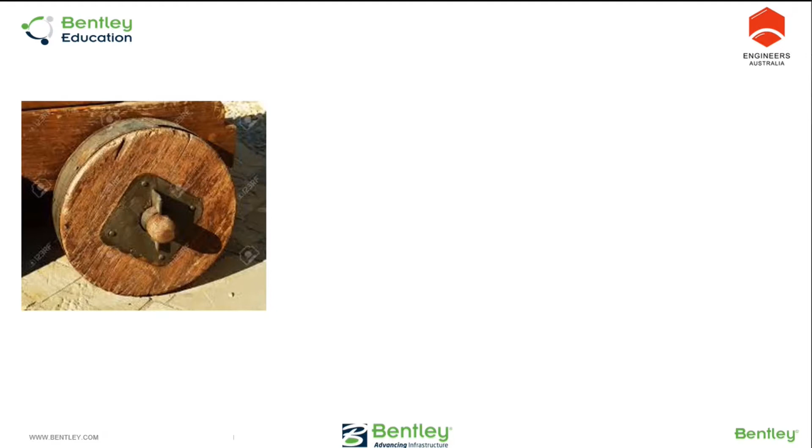The next one is a leather suitcase. Are you aware when this was invented? This was invented as late as the beginning of the 19th century. So when a wheel and a suitcase, independently invented, were brought together, a suitcase with a wheel fixed on it improved productivity and mobility. This was invented in the 1980s. And now there is no traveler who travels without what we call the wheelie, or whatever you call that, right? So how is this relevant?

In the engineering world, CAD is the wheel, BIM is the suitcase, and digital twin is the trolley or wheelie. CAD was actually the first ever revolution that happened in the engineering world. In my earlier engineering days, we used to work on paper-based design, protractor-based design. I'm sure all you engineering students or graduates now would not be working on paper-based design — you would have started working on computer-aided designing. That brought in a tremendous amount of revolution into the world in the form of mobility, sharing work, collaboration, and version changes. From CAD, we migrated to BIM.

CAD actually gave you two-dimensional, possibly three-dimensional designing as well, but then BIM brought in a tremendous amount of data into it — so a design with data, but the data is not real-time data, it's past data, that's what BIM is. People keep talking about BIM solving all problems in the construction world, but BIM is not the ultimate solution to every infrastructure problem today.

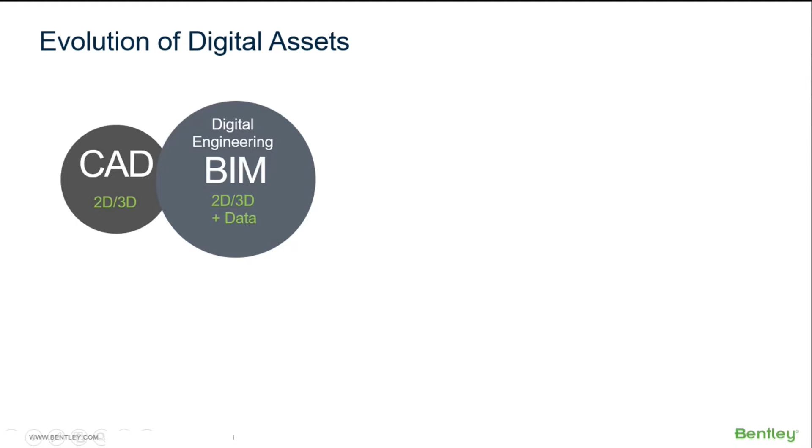From there - and this is very specific for the engineering and infrastructure engineering industry - you start getting data onto that. But the data is not real time along with the 2D, 3D. What digital twin brings across is live data, connected data.

Imagine if you can have a design where you can have live data to look at what happened in the past, and use that live data to do a simulation - to find out if this bridge has been taking about 500 vehicles an hour, and in about 5 years if it's going to be 5,000 vehicles, what is going to be the effect. That could be done on a digital twin.

So digital twin actually helps you do a digitally driven organization or project across the board. Why am I bringing this across? Every organization today in the world - 7 out of 10 larger organizations - are completely digitally driven. They're not going to work with any of the old non-digital models. So it becomes absolutely compulsory for every one of you to be digitally learned, digitally skilled, and that's where this journey will talk about what phases, tools, and how we go across.

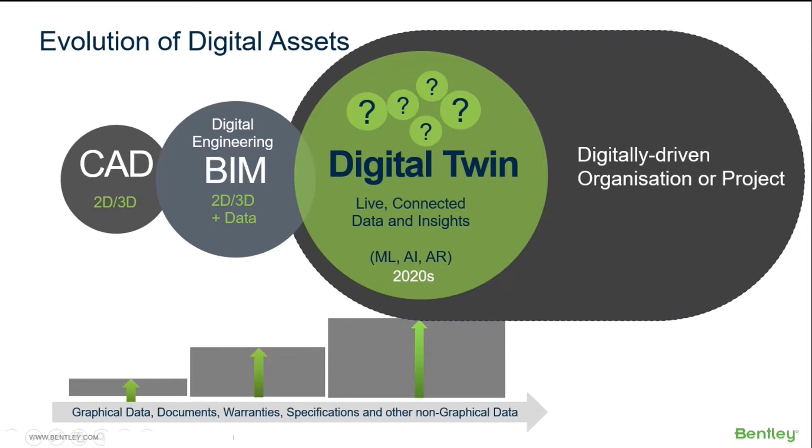All right, so everybody talks about digitalization - why is it important? Particularly in the infrastructure industry, this is for civil engineers and architects. I had taken a chart of 3 different industries here. This is the infrastructure industry, which I've been working on for very many years - can you believe it, it has got the lowest.

Don't worry about 2014 - even today the data is almost the same. The lowest per capita productivity, that is how much each person produces, is lowest in the infrastructure industry, and highest in the manufacturing industry. Why is it? One, infrastructure industry's life cycle is very large - when you build a bridge, it possibly survives your generation and the next generation as well. But also, because of the complexity of the industry and lack of digitalization, per capita productivity is lower.

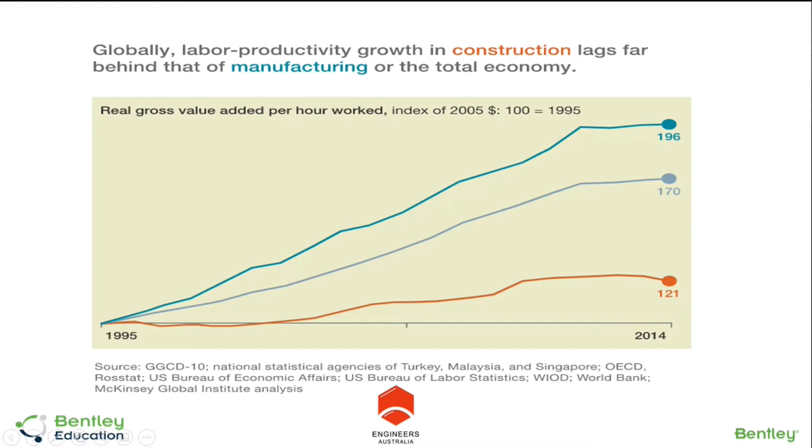I'll give you more data to tell you a compelling story why it has to be digital. Are you aware the infrastructure industry spends the maximum - 13% of the world GDP - the highest in the world? We spend the highest money but get the lowest productivity. If I even increase this by 1% to 2%, you are saving 1.6 trillion that can come back into it.

So the compelling story is not just about why the industry needs digitalization - it's compelling to all of you, why you should be digitally skilled, so that in the industry you would be the most sought after, because they are all looking to improve this 1% to 2%, looking to save this 1.6 trillion. So if you are digitally skilled, if you know the digital processes in any part of the industry, don't you think you'd be the most sought after resource in the market? That's the journey I'm going to take you through.

Okay, digital twins in multiple other industries - other than infrastructure. I'll give you an example here: Red Bull is one of my favorite teams in the F1 race. Are you aware designers are making up to 1,000 changes per week between races? Every week there's a race. In fact, they make hundreds of changes between lap practice and the main match.

That is the level of changes they do because they work on the digital model, not on the physical model. If they want to change the axle or the diameter of the tire, they don't work on the physical model, they work on the digital model.

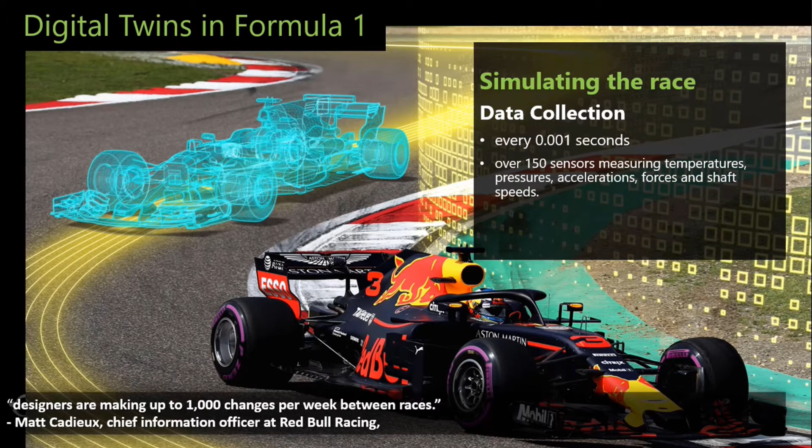Simulating the race, because you have digitalization and the data is live, you can even do a digital simulation of what if the speed goes up a little more, what is the level of thermal heat on that one, what if this wheel spins faster, what is the effect of that? You can do all those simulations.

So this industry is doing extremely well. They are able to make cars that are safer, more reliable, and high performing only because of the digital twin, because they do all the designing and operation on a digital model, not on a physical model.

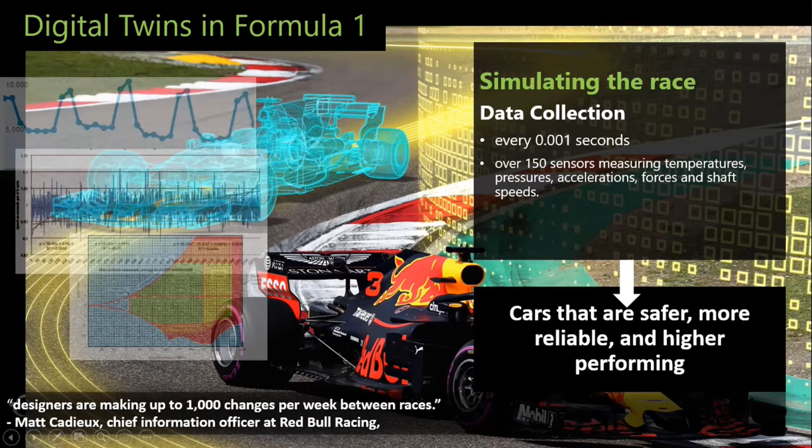Now let's look at the aircraft industry. Same thing: the engine component, the aerodynamics, the fluid dynamics, everything is simulated using a digital model. Even before the first physical aircraft comes across, there is a digital model available.

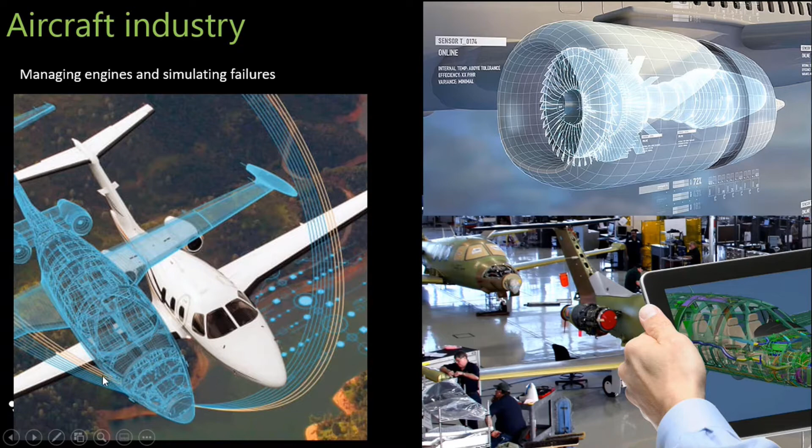But in the infrastructure industry, let me go into that. Where are the places digital twins can play a role for you? You could possibly, in an existing built environment, collect data to find out how to optimize energy consumption. Today everybody is talking about carbon emission, controlling carbon credit, zero emission. A digital model can help you provide data to find out how to change the energy consumption.

And then if you're in the road or rail industry and you want to make a career out of that, you can monitor, track where, and then predict when, rather than react to it. You can proactively maintain the track by doing a digital model to simulate how the track performs.

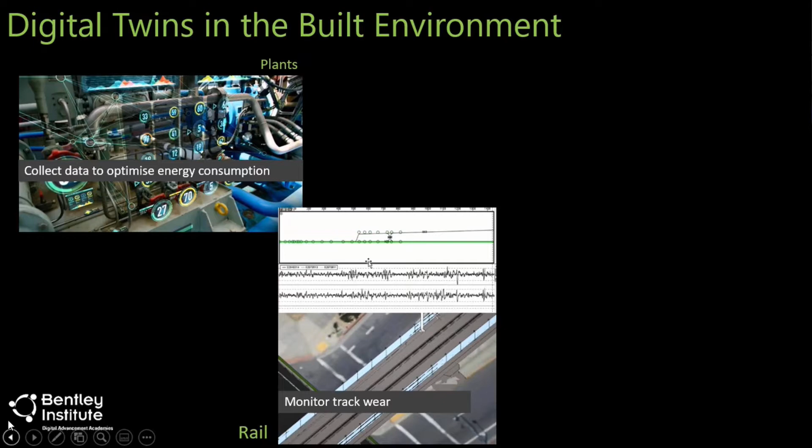And then if you look at it, if you are possibly in wind turbines, you can optimize the turbine performance through better design and better operation.

I brought this very specifically now because in Australia, there is going to be an Olympic game in 10 years from now. If you are going to be a transport modeler getting into a career there, they would like you, possibly in the city of Brisbane, to plan what the traffic increase is going to be. How do I do traffic planning so that congestion could be avoided? How do I ensure carbon emission is controlled? That is what you can do in a digital model, and that's another career opportunity.

Because the Olympics are coming, there are going to be a lot of new cities and new townships built around. You can do complete utility planning: the electricity underground planning, the water planning.

Talking about all these things, let's see what the digital twin is all about. As I explained before, a digital twin is a continuous - please understand the word continuous is important - digital representation of a physical asset.

I used to give a very crude example: if you have a mobile phone and take a picture of yourself, that picture is a digital twin of yours. But it is not a continuous one, because 10 years down the line the picture will remain the same since the data is not updated, even though you would have grayed, or the years would have had an effect on your color, your shape, your hair.

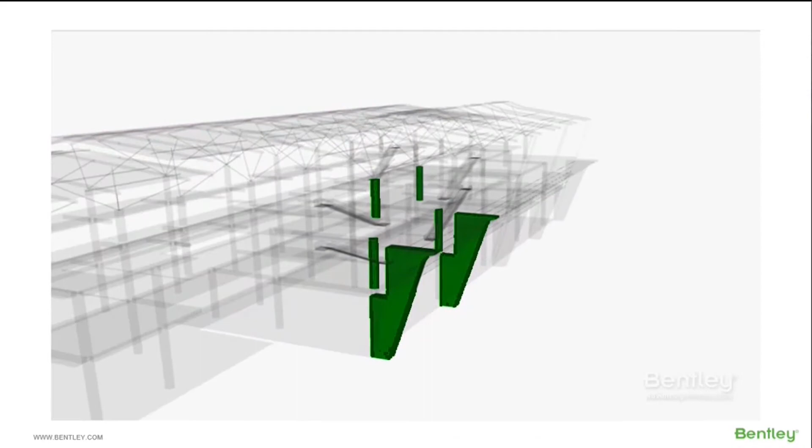A digital twin is a digital representation of a physical asset, process, or system, as well as the engineering information that allows us to understand it, model it, and get its performance. Typically, digital twins can be synchronized from multiple sources, including sensors and continuous surveying, to represent its near real-time status. This synchronized data can be used to gain valuable insights to more fully understand the physical asset.

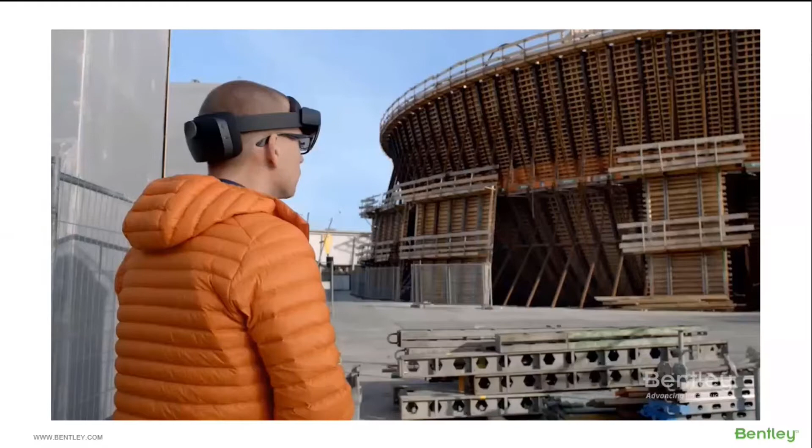Infrastructure digital twins, or I-twins, are emerging now because of a convergence of technologies that enable an immersive and holistic view of infrastructure. When he says emerging now, that is where the career opportunity comes across, because the infrastructure industry is now getting digital and iTwin is coming across. If you have an opportunity to learn iTwin, if there is an organization which is willing to give you an opportunity to lay your hand on iTwin tools, processes, learning material, that's what is going to be the end of my conversation.

I should add that if Bentley, as a commercial organization's goal, is to create an ecosystem for the iTwin, Bentley Education's goal is to create an ecosystem of iTwin and a digitally skilled workforce - that is you people who are getting into and who are going to be the future engineers to go across there.

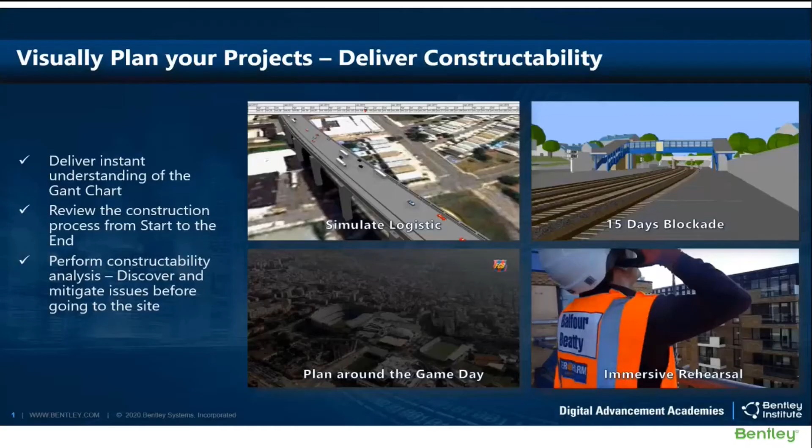So we heard about what is digital engineering. I'll show you a digital twin, and I will show you an example of what a digital twin can do. I'm now going more into the infrastructure industry.

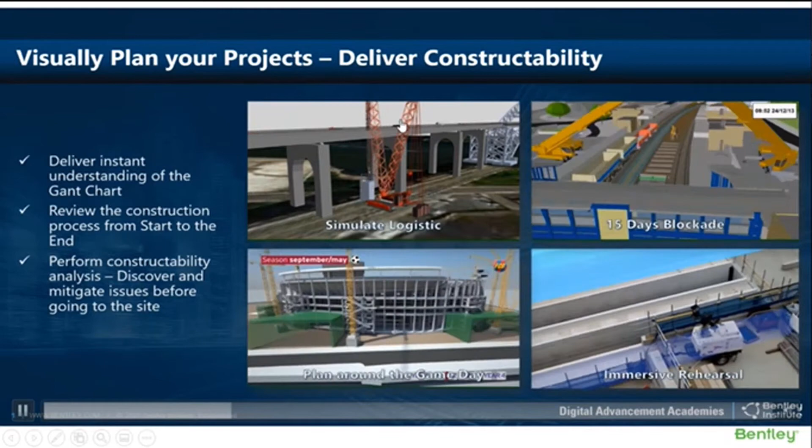You could be a logistic manager, digitally planning the logistics that are needed - you need a crane at what time, which day, and you need this vehicle to come and pick it up, what day, which day. This is not done physically; you're sitting at your desk, not on site, using our digital twin and other tools to work on a complete logistic planning.

And then plan - if you're building a stadium, and you know when the game is coming on, you could plan your schedule accordingly. And you could be a training manager where before they do a job, they can do an immersive rehearsal digitally, because they are handling such large beams - how do I place it across? So these are certain processes we can get into.

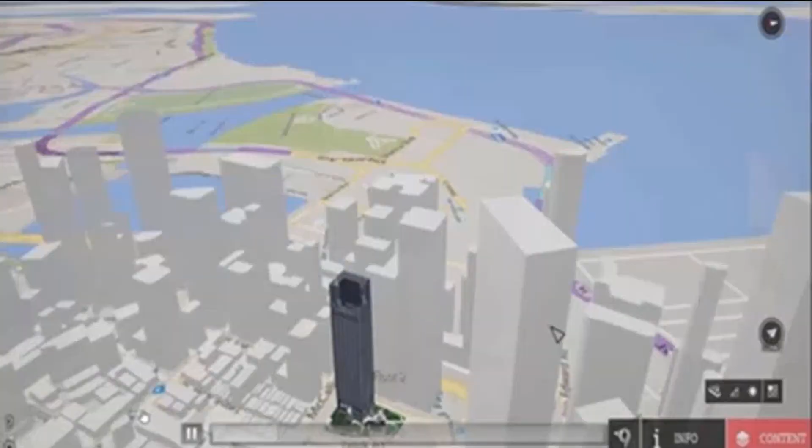Now this is a digital twin - I'll stop the video for a minute here to show you. This is actually an actual digital twin in Singapore of a tower called Fraser Tower, which was built by National University of Singapore students. Let's see what happens here.

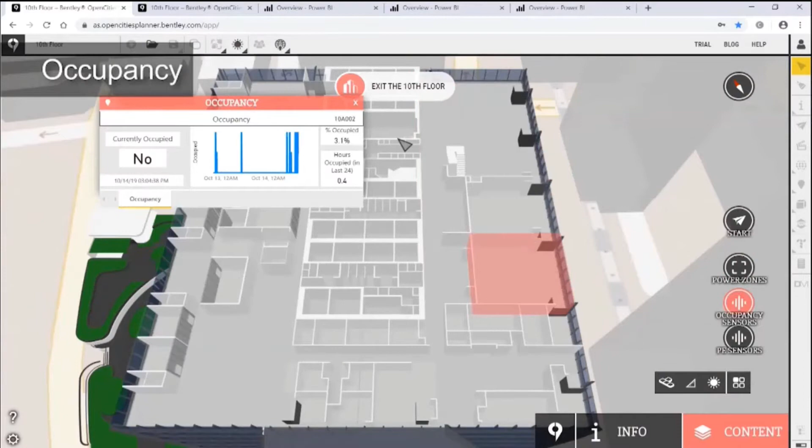Let's go on. Floors 9 to 14 belong to Microsoft - Microsoft has their Southeast Asia head office there. The digital twin actually gives you a cross section of the building. You can do an analysis of how many people are occupying it, what is the energy level, and can I have an automatic system where when the occupancy is lesser, can I cut it off? So this is what a digital twin can do for you.

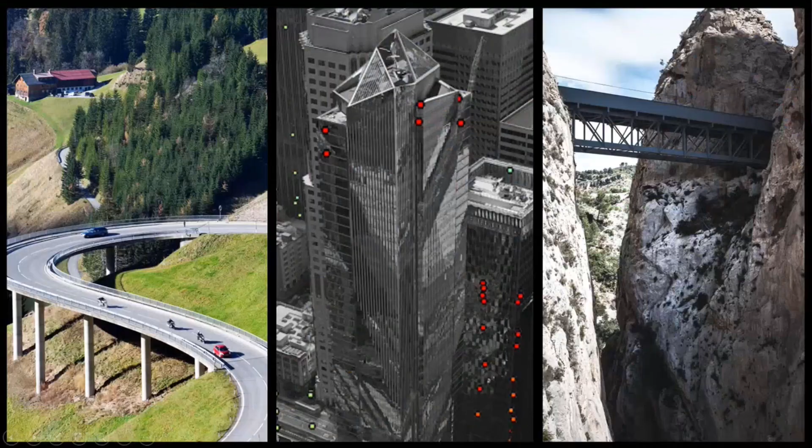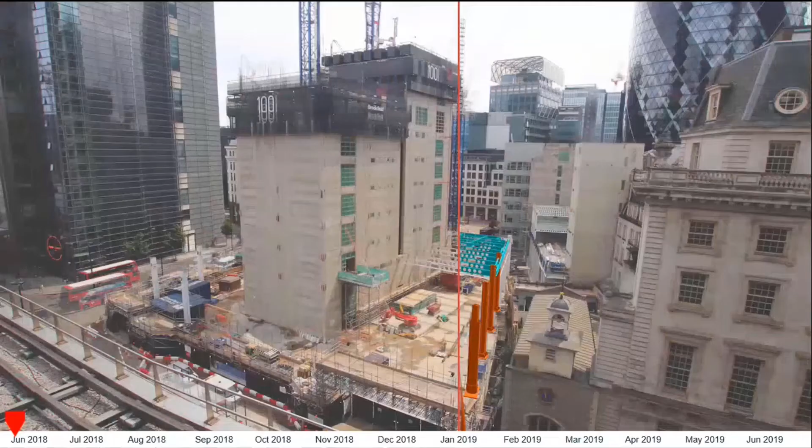And now this is again a digital twin in construction management. Watch the scale at the bottom - you have June to... actually, a digital twin lets you get into a time machine to go forward in time, come backward in time. So I could be on September 2018 as the scale moves on, and I want to know by March 2019 how much of the building would have come up and what level of construction would have gone on. That could be done as a simulation here, and that's a career opportunity for you.

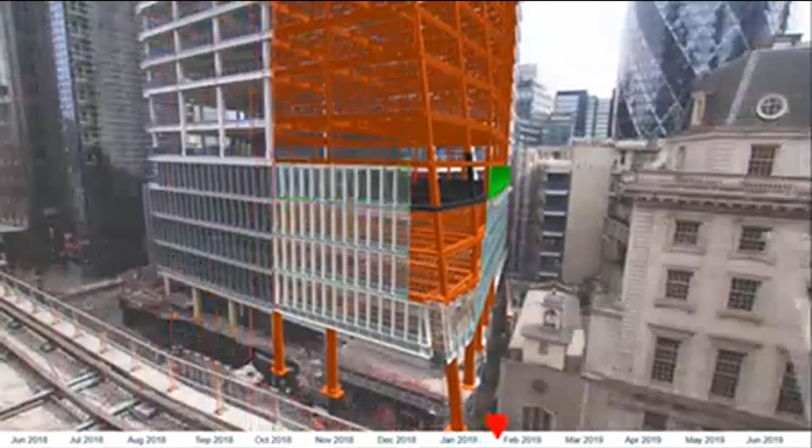Or I could be a resource planning, a supply chain guy saying that in October 2018, I would need about a couple of cranes, and then I would need a couple of brakes, whatever you can do using a digital model. You can do a digital simulation of a construction process. You can move forward, come back in your time. That's what a digital twin does.

So now, so much about digital twin I've talked to you about. Let's get into what are the different phases and what are the career options that are available. Now we are getting into the thick of it.

If you look at any infrastructure industry, if any of you have built a house, you start planning where the house is, what the site is, what is the cost, what is the contractor, what is the supply chain. So there is a planning stage.

From planning stage, then you start designing, right? From a design stage, when you've done a design, you come back and analyze the design, saying how structurally strong it is, how good it is on the soil, and what is the level of energy consumption.

If you're building a road or rail, what is the transport that can go across? What is the electrical need? So you do an analysis, and then you go back to the design, because analysis says the design has to be changed. So you go up and down. Analysis is another stage.

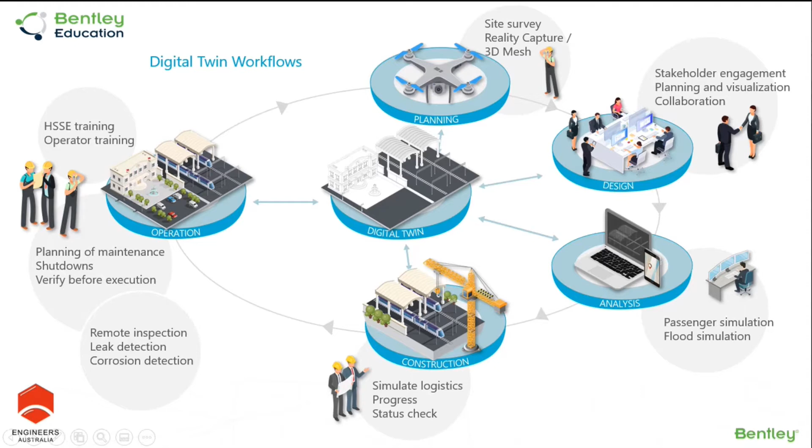As I said earlier, infrastructure industry is very unique. One place where 80% of the life of a whole infrastructure stays in the operation stage. Imagine the kind of career that can be done across here. I will talk about what are the possible career opportunities that are available. I've highlighted a few there.

If you look at each of those stages, what could be a job opportunity that could come across? In a planning stage, you could possibly be a site planning guy as a geotech, or you could be a 3D draft person, because you can do planning digitally. I will dive into planning further to talk about what tools Bentley brings across and how it can enhance your career. If you're in a design stage, these could be the different career jobs that are available.

Since I'm going to deal with every one of them, let me run through this slide quickly. If you add the whole life cycle together, I could think of 22 different job opportunities or career opportunities. All of them are very strongly digitally placed. So digital education is important.

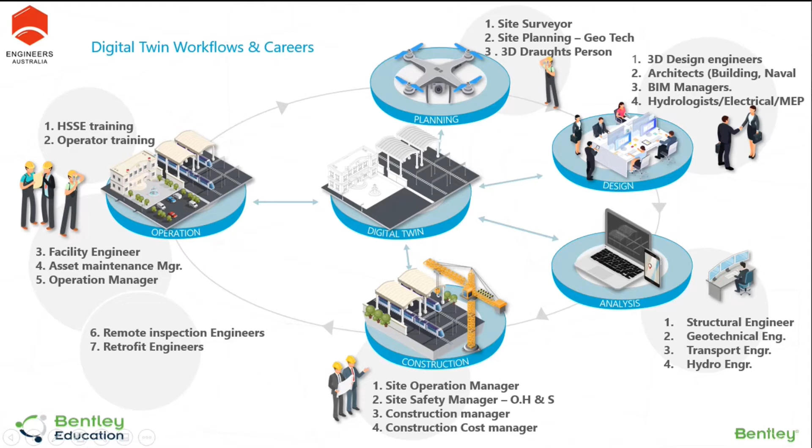In my days, 20 years ago, people used to walk around the site with a tape in their hand, with a couple of pencils and paper, and then measure it across. But the digital world has completely changed it. Imagine if this whole area is about 25 to 30 kilometers long, how long it will take for you to measure and do a surveying with all those methods.

But then the digital world now, by flying a drone, you capture a picture of the whole surface, whole area there. And then step two, you take that data into a product called Context Capture, which is a reality modeling tool, which is actually offered in our Bentley Education as a learning tool for you. I will talk about it later.

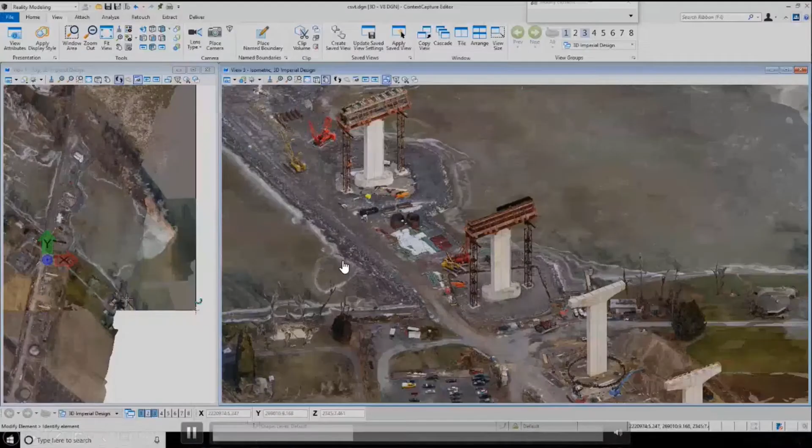And then you take a whole picture of the whole land, and then start working on creating an engineering mesh to find out multiple analyses. It could be a soil analysis. It could be a water flow analysis. It could be a structural analysis. You could do all of those kinds of analysis as a planning guy, as a quantity surveying person you could be working on.

And then it also shows you the level of meshing, and tells you the various levels of unevenness of the ground. So where do I cut? Where do I fill? All of this could be done sitting in your office, sitting at your desktop.

Rather than going across and taking measurements with a tape in your hand, you capture a picture as and when needed. We talked about a non-built environment, a barren land where you do complete planning activity. But we also have digital planning for urban planners, city planners, or council planners, where you have a built environment and want to do retrofit planning or other planning.

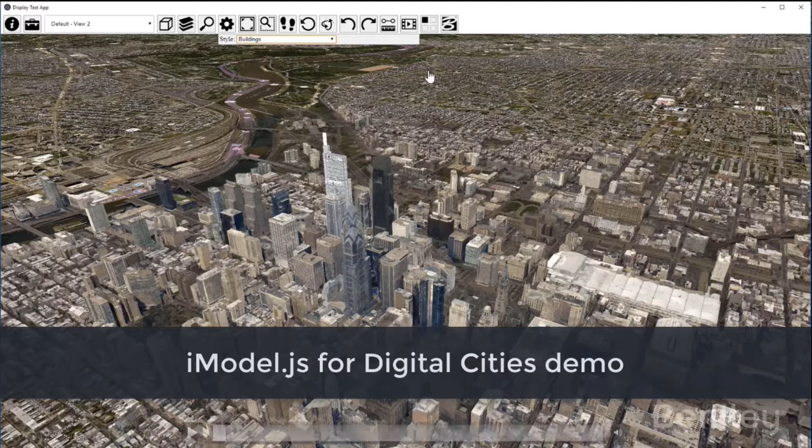I'll show you a video to give you an idea. This is the city of Philadelphia, an actual reality digital model of a whole city. We're using Bentley's tool called OpenCities Planner, part of an education package, where you could possibly be an architect working on a historical building, marking those buildings so that no changes are done.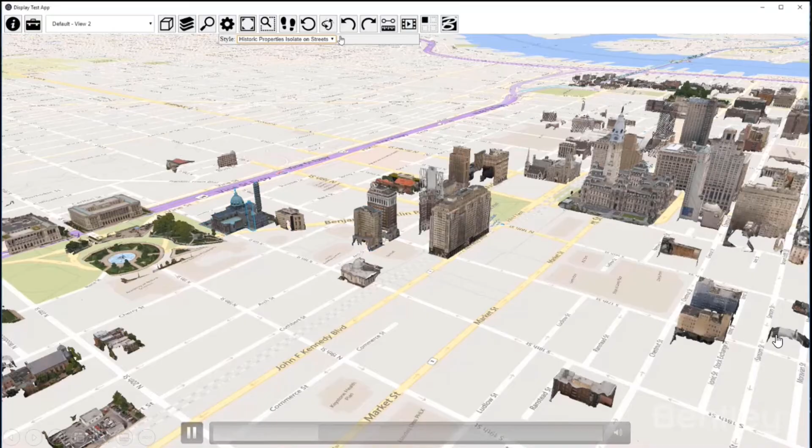You want to see how do I strengthen it, how do I retrofit it, what are the cracks that are happening. You could be doing that kind of planning to work without changing the building, because it's historical.

Or you could be planning a tall building to find out the level of energy consumption, or be a revenue planner finding out for each zip code or postcode what revenue is coming in, what the level of occupancy is, or identify a commercial corridor and do traffic planning for peak hour traffic. These are the kinds of different planning activities you could do using reality modeling as a tool with a digital twin concept.

So typically the career I'm talking about here is you could be possibly a site planning person with geotech, that is soil analysis, or you could be a 3D draughts person you could be working on.

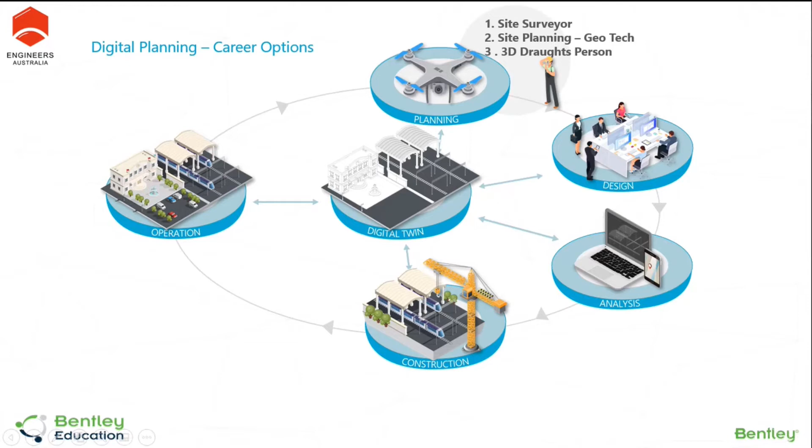So let me go into the design stage now. Design stage is where you've done the planning, then you're getting into design. What are the career job opportunities? We will come to that.

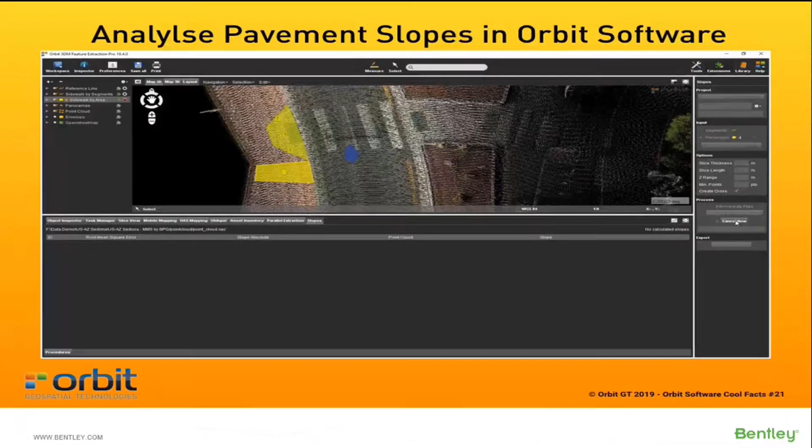I'll again show you digitally how a road design is done, where pavement for a road has an inclination for mobility vehicles to go across. This is actually a digital model of an existing road. I've run it, and this is the video of the data that's been collected, and this is the digital model.

Believe it, this measurement of the slope he's trying to do, he's not at the site. He can be working at his desktop in his office after taking a picture, and the measurement is so accurate for the inclination, using our tool called Orbit, which is also part of an education package.

Orbit is a tool which helps you do pavement design, road pavements, and airport runway design, those kinds of things. So using the tool, he has identified the level of inclination, whether it passes the government's needed statutory requirement, fills up the data automatically, and tells you yes, it is ADA compliant.

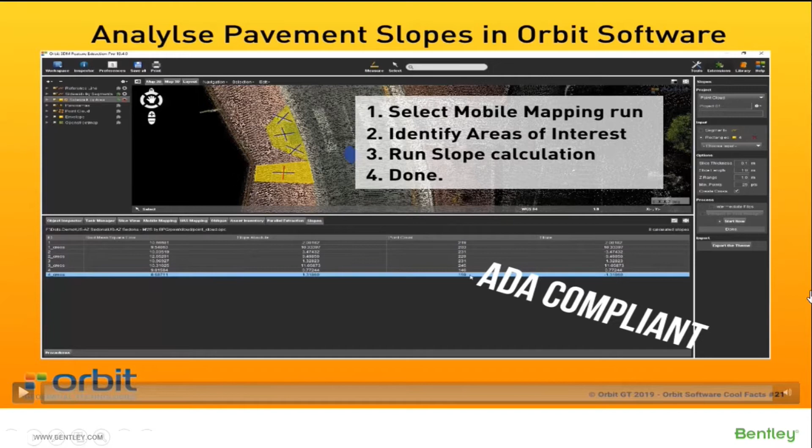Most of you taking this call from Melbourne know we've had many accidents where bridge clearance has always been a question, trucks not able to go under the bridge. This is bridge design, a digital model using an architect showing what the clearance is going to be, and whether I can plan the road construction accordingly.

Look at the model here. This is the actual city video model, and this is the digital model using the Orbit product, where we use a digital model, sitting at the tabletop, measuring the road length, and accurately measuring the clearance between the bridge and the road, to determine if I have to make a slope in the road and plan and design it accordingly.

If you are going to be a design engineer on the road, imagine the level of advantage these tools can give you, and how efficient and productive you can be. If you have to go in person and measure it, imagine the amount of money and time you'll spend. Here, it clearly tells you up to a millimeter the lowest clearance.

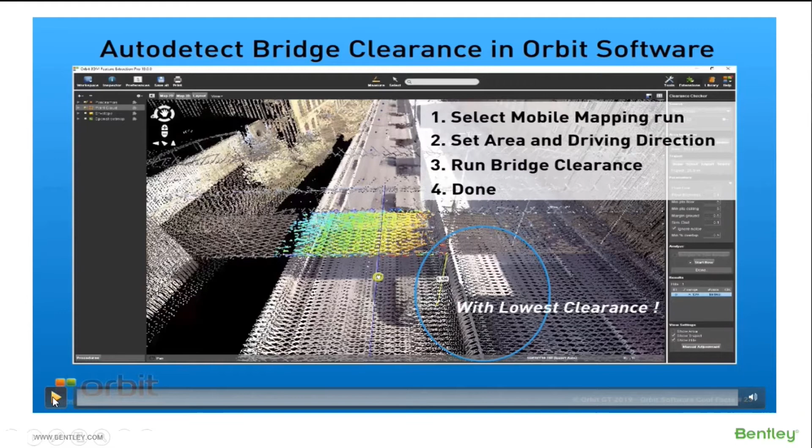So I've just taken two cases to show you how design, digital design or digital twin design, can help you out. I'll go into the next one.

This is actually where, typically in any engineering design, there are multiple versions done. Using a digital prototype or digital model, you compare one version of the design with another and find out what the change management is. This gives you an idea that on version 8, the width was 800 millimeters, but on version 12, it's 1200 millimeters.

If you look at the design, there are career opportunities available. There's a 3D design engineer option - it could be road design, rail design, bridge design, or building design. So as a design engineer, there are opportunities available.

You could be an architect designing a building look, or working on structural, heat map, or thermal map aspects. You could be a naval architect designing a hull, a floating vessel, or an offshore platform.

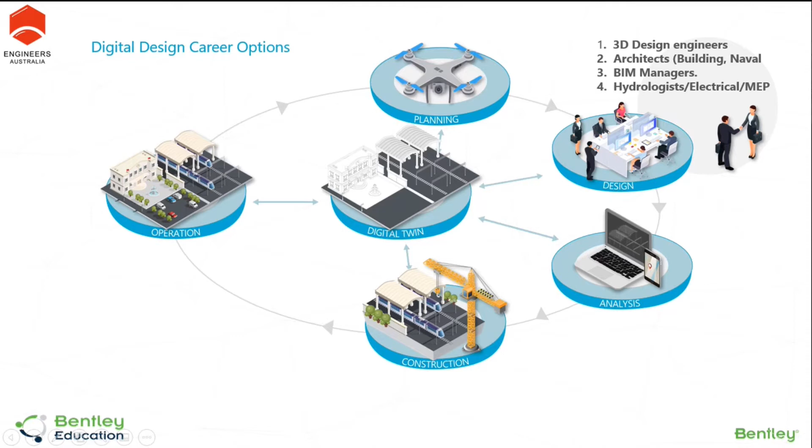Using a digital model, you could be a building information manager, a BIM manager, because from design data there's an opportunity for that role. Or if you're into water, you could be a hydrologist planning a whole network of water supply - fresh water or recycled water. You could be an electrical engineer for a building doing electrical design, or an MEP engineer - imagine using a digital twin, a digital tool. These are the various career opportunities available.

Now let me go into the analysis part, where the strongest opportunities are available in digital engineering, because when you have real-time data, you can make a very well-informed decision - data is information, and information is intelligence to you. So when you talk about digitalization and digital twin with real-time data, that allows you to do multiple levels of simulation. When I show you, you'll be able to understand.

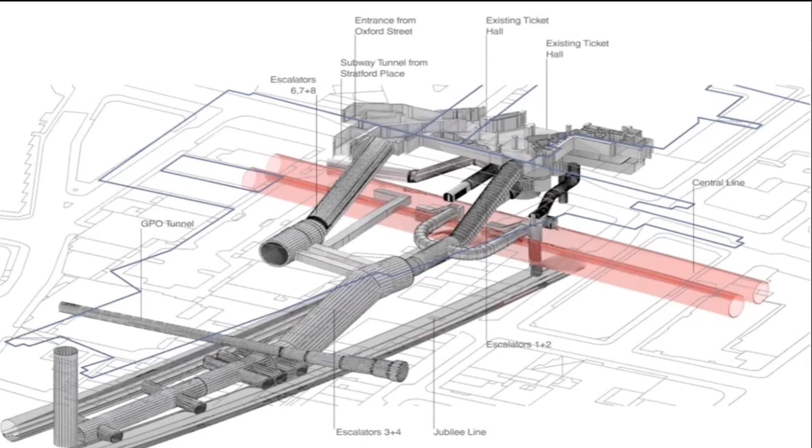This is actually a train station - an actual use case with Bentley in London, the Bond Street train station. This is a digital model of the train station, and as a traffic modeler or pedestrian traffic modeler, someone is able to simulate and find out what the level of congestion will be every time a train comes in. This is actual data collected from multiple closed circuit TVs, and using that data and multiple other data sources, one is able to clearly simulate what the traffic will be in 2031 at Bond Street Station.

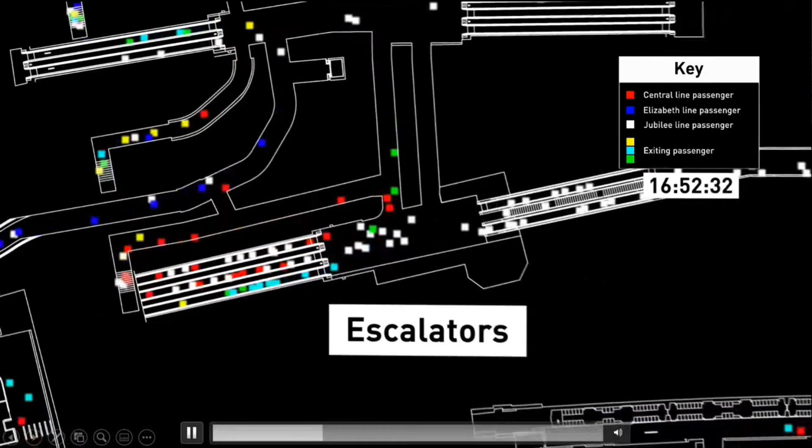If you look at it, you can plan what the Bond Street Station evening rush hour will be like in 2031. You could go back and tell the design engineer that if you possibly increase the number of boom gates or gates here, more people could flow in, so congestion could come down. Or you could tell the operation engineer that during non-peak time, you can close a couple of these gates to save power and energy. So see the level of simulation effect that could be done on Bond Street Station to find out about pedestrian traffic.

This tool, which helps you do this whole planning, is available as part of a Bentley education tool for you to become an expert in that. I will take you to the next one.

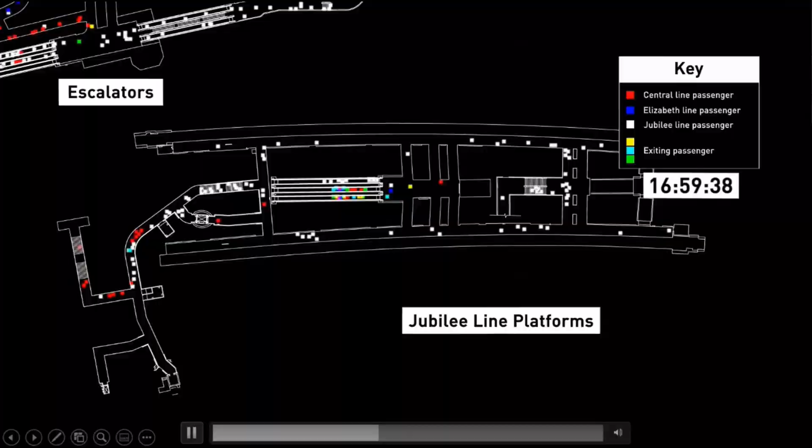Or if I'm going to be a climate engineer, I will find out in winter what the wind velocity will be to create comfort for the pedestrian, so I could change the design accordingly. But as simple as that, if I'm going to be a pedestrian traffic planner, I can find out how long it takes for people to clear across, particularly in pandemic days or in an emergency case.

This is again a tool available within Bentley Education, where you can do this kind of simulation, using multiple technologies to work on that.

So we talked about analysis - what are the careers that digital analysis helps you with? You could be a structural engineer using this digital tool, not working on the physical structure. I have at least half a dozen universities working on concrete bridges to do a digital model to find out, if traffic is increasing every year by 10%, what is the load bearing on the bridge, and when do I have to predictively repair it. That is what a structural engineer can do using a digital twin for analysis.

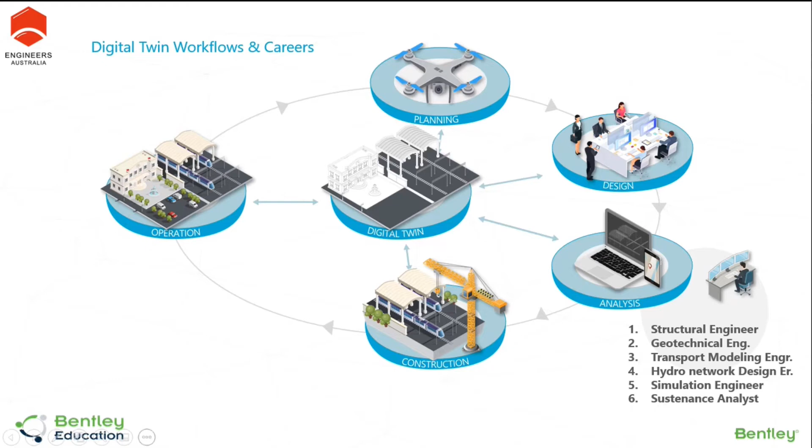Let me go into the construction part of it. Construction is where you've done the analysis and start building it - either you manufacture it or build it. Let me give you a picture of this.

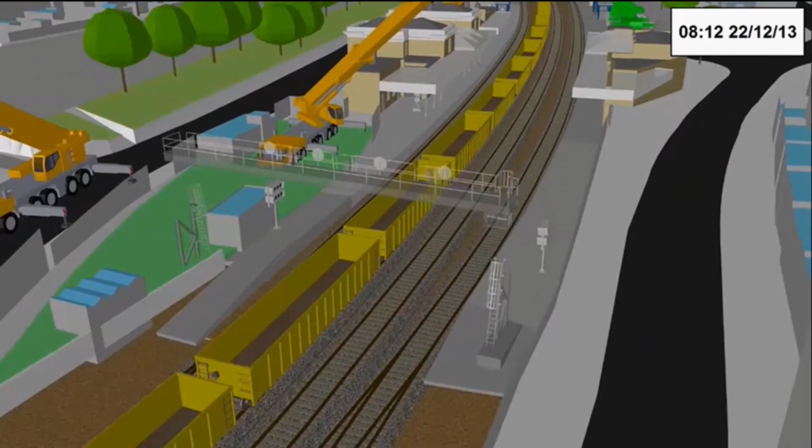This is construction planning using a product called Synchro, which is again a brand leader in the market and part of the Bentley Education tool where you have an opportunity to learn it. Synchro actually helps you plan your construction schedule, supply chain management, and safety management within the site.

I'm running this quickly - if you look at the top right corner, there's a clock running. This is simulating, according to my construction planning, which parts are going to be constructed on which days. So if you are a logistics planner or supply chain planner, you can clearly say I need heavy lifting equipment or concrete laying equipment only between these days, and plan accordingly. Imagine you're part of an organization like Arup or WSP, and you know this tool, and then you can plan it across.

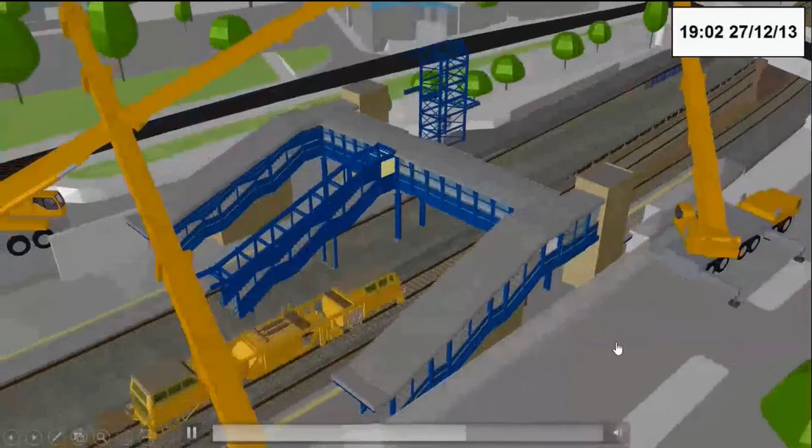This is typically helping you do a simulation of moving forward in time, planning your scheduling, your supply chain, your resources. You could even be a safety manager saying, if there's going to be a crane coming, I may have to block that part of the site. No traffic, no people coming in—occupational health and safety, that could be another opportunity. Or you could be a training engineer showing people how the whole work goes on and what the rules and regulations are.

So that's another opportunity. I'm going to run a video here.

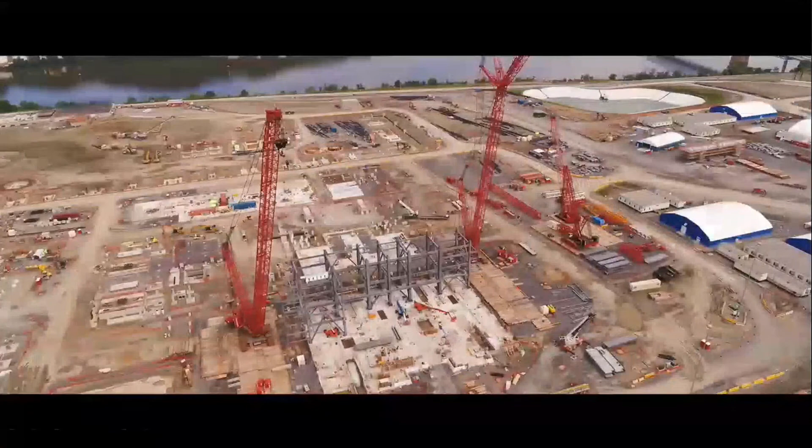Here at Pennsylvania Chemicals, we have the opportunity to be the plant of the future. The more data we have, the smarter we have to get about managing it. Everything at a site is located by an equipment tag. FindAll uses that as the basis to connect all the different databases. We have complete accountability over 3 million documents and equipment tags on this site. Now I can go to the tag number for my equipment and immediately find exactly what I'm looking for.

Digital twins use drones to take construction project snapshots on a weekly basis, and from these images we create accurate 3D models. This is an interesting one.

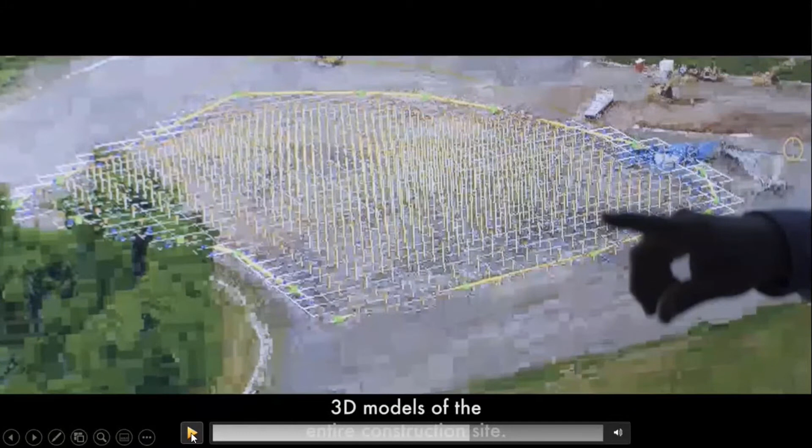This is actually done at a couple of sites in Victoria now, where they want to see the progress of the construction because, due to the pandemic, people cannot go to the site. That opens up a lot of new job opportunities for people who know the digital tools to manage this, people who know how to take data out of it and see how it's working on the digital data—they have to work on that completely.

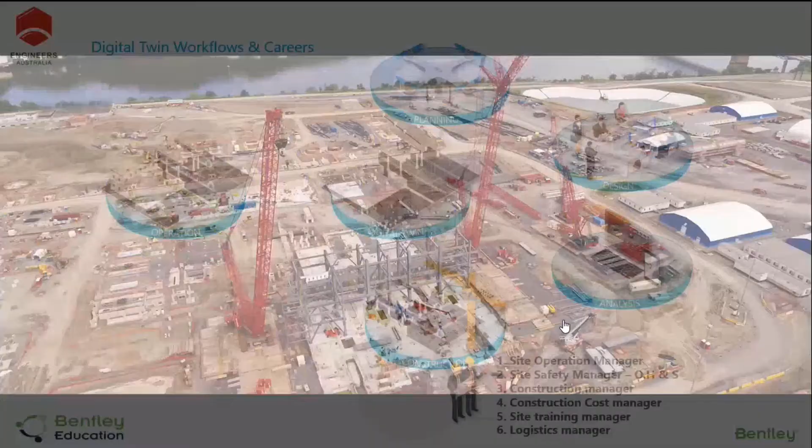So in construction, what I showed you—these are the kinds of job opportunities where you could be a site operation manager. Using a digital model, you would know that in the site, on the 7th day from now, I'm going to have a crane coming in; on the 14th day, a digging equipment coming in; on the 17th day, it's going to be electrical work.

You could be a site operation manager, or a digital site safety manager—I talked to you about occupational health and safety. You could be a construction manager doing schedule planning, a construction manager doing supply chain planning, or a construction cost manager, or, as I said, simply a site training manager or logistics manager. These are some of the opportunities available in construction.

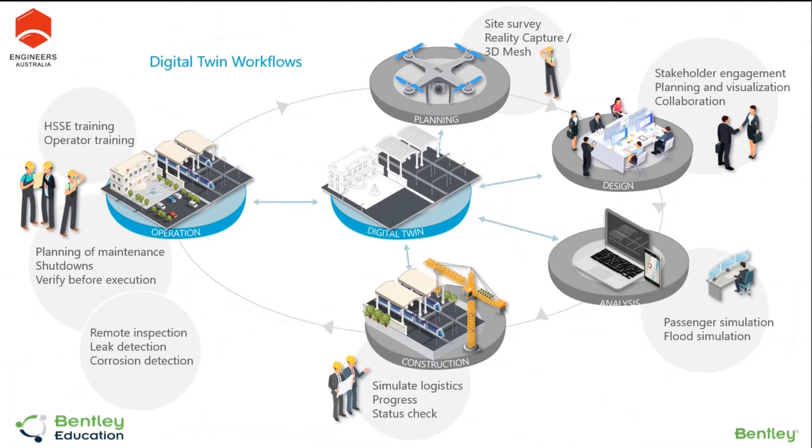Now we're getting into the longest part of the life cycle, which is the operation, where people actually maintain and operate infrastructure—be it a rail, a road, or a building—because that has a very long life. Let's look at the different avenues available in operation.

This is again a real-time story showing multiple opportunities you can have if you know a digital tool, and you can learn more from our tool. This is actually a bridge in Minnesota, USA, where in earlier days, before digitalization, people wanted to inspect where the cracks were, so they used to hang on a rope and go down to check it. Let me not take the heat out of the video—have a look at it now.

I was reading through a magazine and saw a picture that was kind of grainy, black and white, showing several men, bridge inspectors, on ropes hung over the side of a structure. That picture had been taken in 2013, but it looked like it was from the 1960s. We've got to be able to do better.

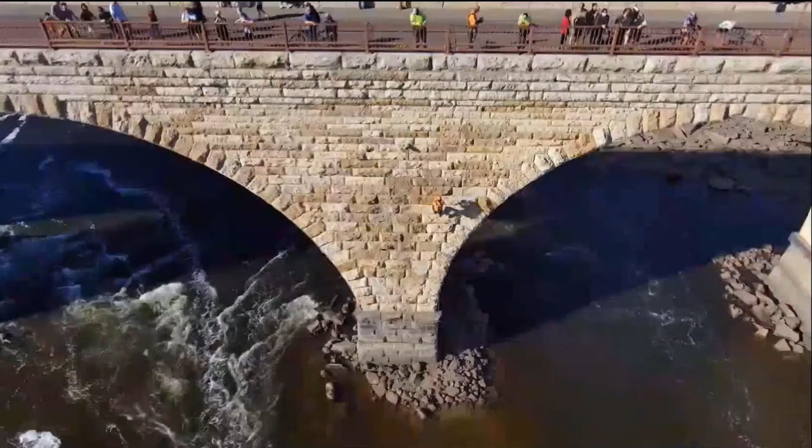There are currently over 20,000 bridges in the state of Minnesota. It's important to keep on with inspections so we can properly maintain them over the course of their life and find out when they need to be replaced. We started partnering with Bentley because both of us really wanted to use technology to improve the inspection workflow.

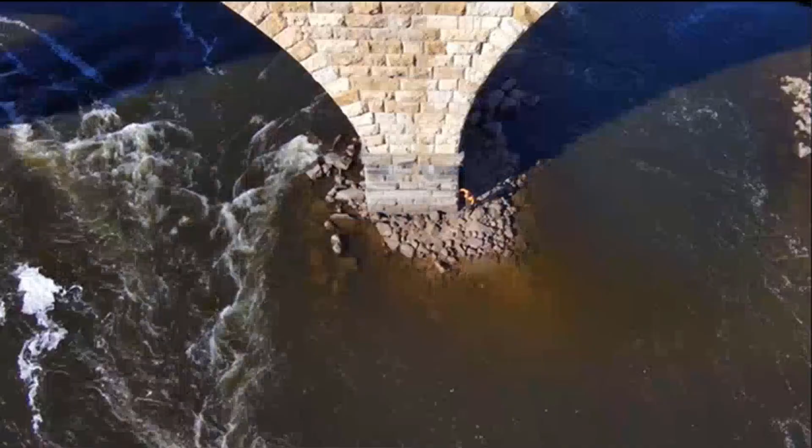Most of those engineers don't go out in the field much, so it's hard to relay through close-up pictures and explain to them what I'm seeing. We came to look at HoloLens to get an understanding of what's actually happening in the field without having to be there. The HoloLens and the Azure remote rendering was a really unique way to bring the bridge into the office to do the inspection.

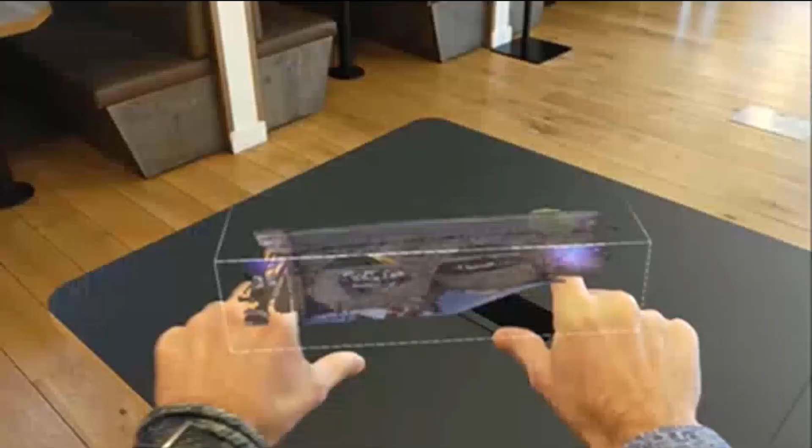Our company has been very involved in the idea of digital twins—computer models that replicate what's physically out there in the field. These images can get right down to the cracks themselves; we can measure the width of them, not just the length. They're that detailed. We have all this information at our fingertips that we never had before.

If we could reduce the overall expense by 10%, that could be a humongous win. Now we're talking potentially several times that in overall savings. The graphical processing and streaming has to be spot on with the Microsoft HoloLens 2 and the Azure remote rendering capabilities. We're able to see accurately, truly geometrically, the impact of changes over time. Everybody says, oh, this is like science fiction, but it's real.

I like that word, it's like science fiction. So not only does it give you a career opportunity, it gives you a career opportunity which is almost like science fiction. You're not going to be sitting in a mundane office working on a piece of paper. There are 4 or 5 points I want to highlight.

In New South Wales, there are more than 7,000 bridges. Now government has gone ahead to say remote inspection is the way to look at these bridges. So imagine the number of job and career opportunities that creates, starting from data capture, drone pilot, to a structural engineer who can bring it all together. The whole bridge is digitally brought down to the working table of an office, they're not going to the site. Imagine the career opportunity that can give you.

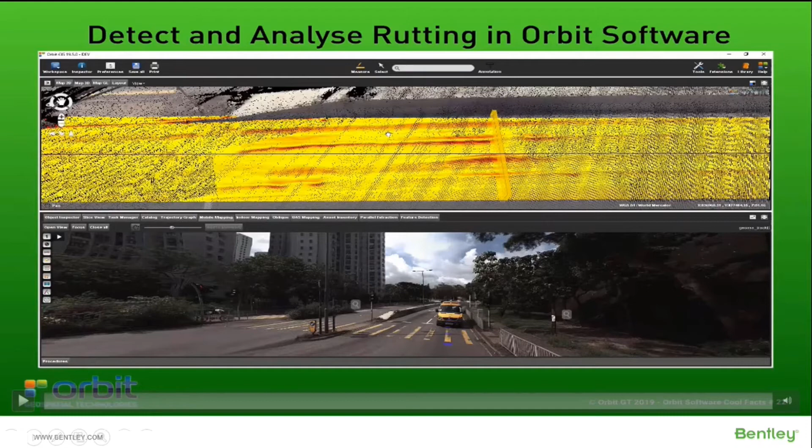I'll go closer to your home again. This is about road and pavement. Coming back to orbit, if you want to see how the road is rutting, because over a period of time the load of multiple vehicles traveling creates damage to the road, what we call rutting. This could be digitally done using a photograph. You run that vehicle, and with the digital tool, an orbit tool, you would be able to precisely find out which location the rutting is highest, because these maps clearly show you where the rutting is the highest. They are geo-positioned so you can go up to half a meter closer to that place to find out where the rutting is, and you can work on it.

Imagine if you are comfortable using an orbit tool, the kind of career opportunities and productivity we can bring across. And this is actually a big story in Telstra.

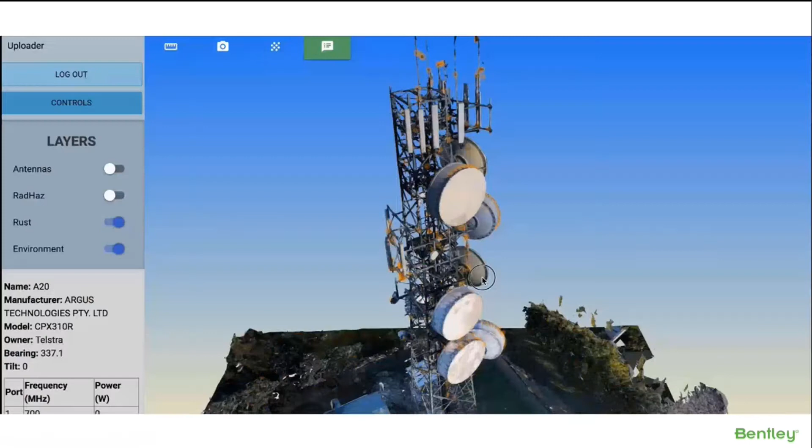This is a Telstra tower that was captured. Today there are tens of thousands of these telecom towers all over Australia, and we have to check the level of rusting, the level of damage. Nowadays people do not climb up this tower, they only take a picture of it, using a digital model from a drone picture. In 2019, this is the level of damage that has happened. But if you look at the 2018 picture, you can see the progressive rusting that has happened. So if you are an operations manager or maintenance manager, you would exactly be able to plan when to change it, paint it, or repair it, whatever it is you need to do.

This is a very interesting video. This is not about maintenance, it's about retrofitting in an existing built environment, where you are adding a train station or a bus shelter. Have a look at this.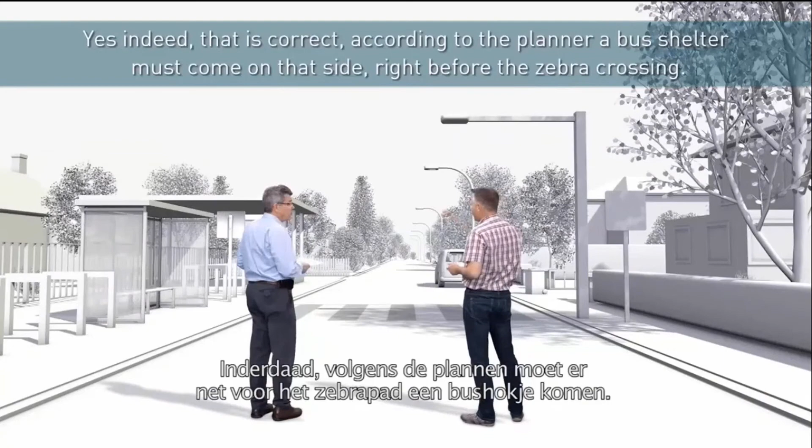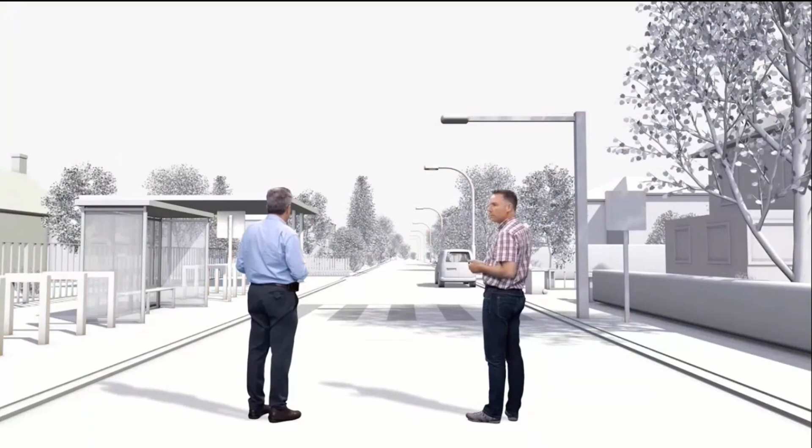Tom, a bus shelter must be built at Brunstaller Street 71 in Ghent. Let me check it out. Yes indeed, that is correct. According to the planner, a bus shelter must come on that side right before the zebra crossing. Are there any possible obstacles we have to keep in mind at this location, for example to let a tow truck pass? And what's the height of those streetlights over there, since they are not at the site to measure? That is going to be okay, the tow truck will be able to pass underneath properly. But I see that on that side the sidewalk is reasonably narrow. There is also a parking lane, but I'm afraid we still have to take a small piece of the road. Let me check the width of the road over there. Just as we thought, all done on a handheld device. I think it would be best to provide a temporary detour anyway, in order not to bother traffic too much during rush hour. But what about the traffic flow in the surrounding streets here?

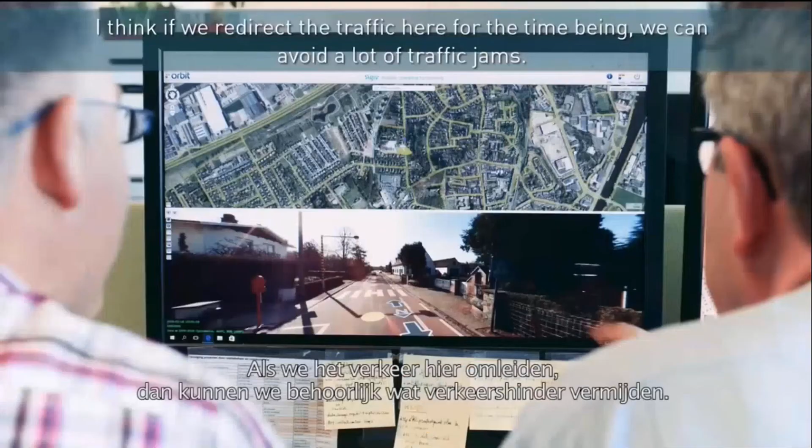If we redirect the traffic, can you see here, for those sitting in their office, being able to work, we can avoid a lot of traffic jams. Getting a clear picture, in this job as an operation manager or operation person, he was able to find out whether vehicles can come in, plan the logistics, measure the length of it to find out whether a bus shelter will fit in, plan the traffic, plan the production, and find out which is the danger area. Imagine all of this could be done if you have a skill to do that, the level of job opportunities that come across.

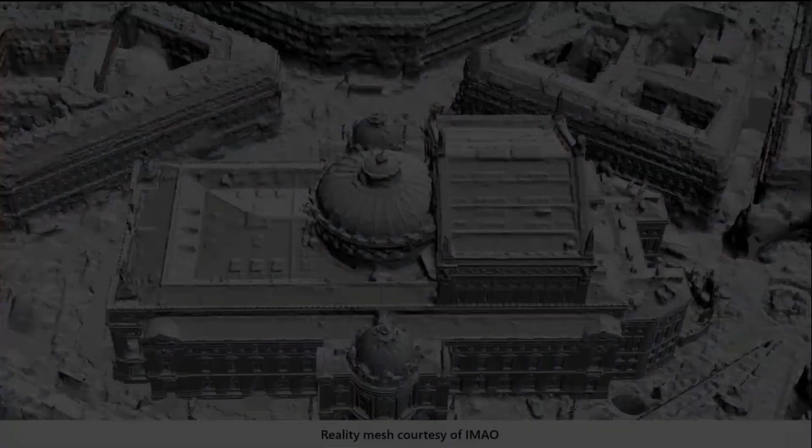This is an interesting one for hydrologists. This is again a real-time story. This is the city of Paris, where we are able to simulate how the flooding will happen according to the rainfall.

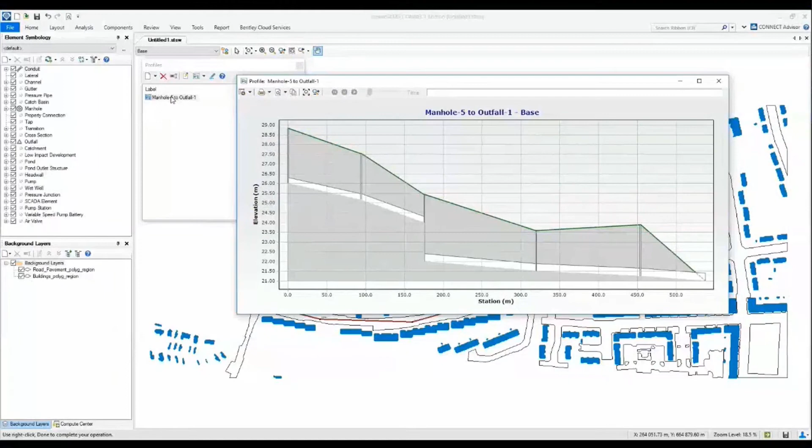Let's look at this. If you are able to plan, you use our tool, what we call Bentley's WaterGEMS tool, where you can actually do flood modeling and plan where the water outlets are, where the manholes are, and it will clearly simulate and find out, according to the different level of rainfall, if you have the data, that there's one manhole that is not good enough. If you don't increase the number of manholes, this is what's going to be the effect of flooding. Again, a digital model, a digital twin.

This by itself is a career opportunity for any new construction site. If you're doing a construction, and there's going to be rainfall, what is going to be the site effect on the construction site or any built environment, what is going to be the flood effect? Imagine these tools - the whole set of hydrology tools are available within Bentley's education tool.

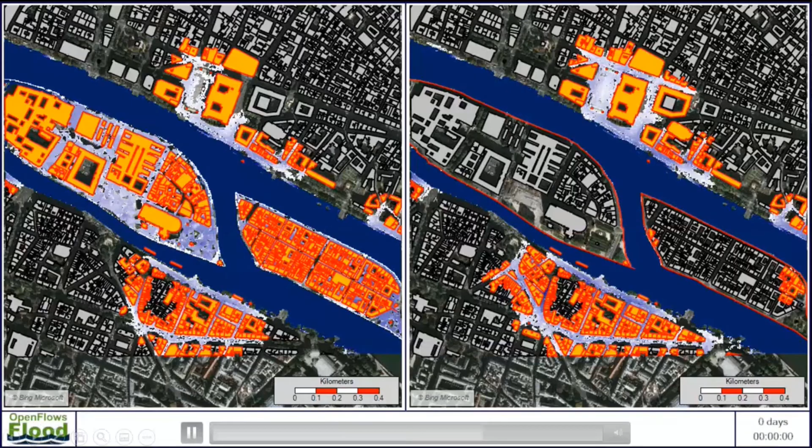So that's about construction and operation, where there are more than 7 different career opportunities available. You could be an operation trainee, a facility engineer, a maintenance manager - you saw them on the tower, but it could be not a tower, it could be a bridge, rail, building, anything. It could be an operation manager - you saw the two of them working, saying they need to bring a bus shelter. You saw in the bridge the remote inspection engineer, and the retrofit engineer where they built that bus shelter being brought across. Or you could be in training. These are the different career opportunities that are available.

So we've touched on 22 different career opportunities going digital, but why should you depend on Bentley for that? What is so unique about Bentley? Here we go.

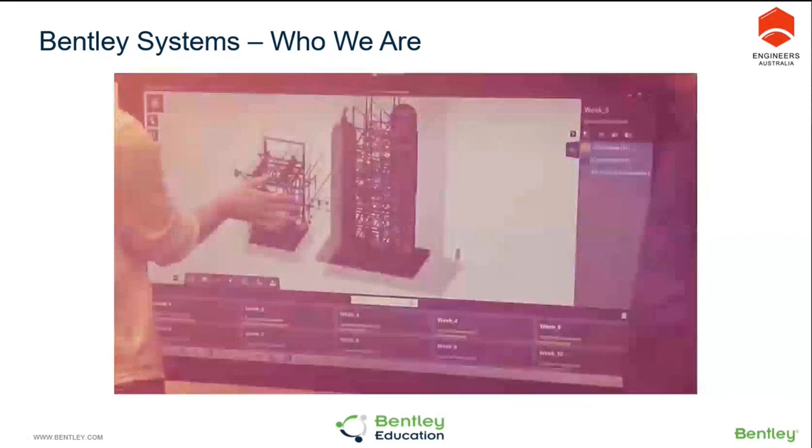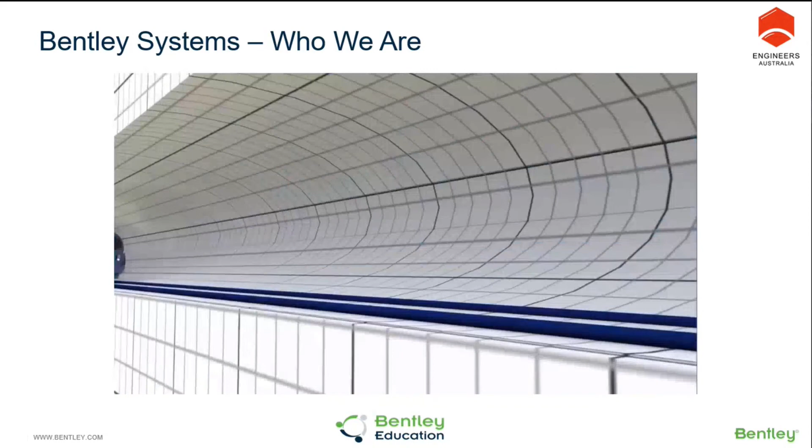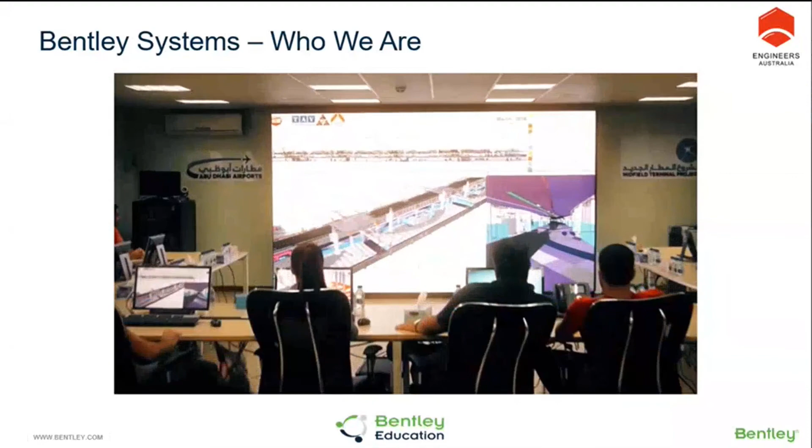Around the world, engineers and architects, constructors and owner-operators are using Bentley's software solutions to design, build and operate infrastructure - rail, road, offshore, wind, across different industries that sustain our economy and environment. Together, we are advancing infrastructure. Bentley software has helped us deliver a successful Crossrail. Together with Bentley, Crossrail have created the Information Academy - creating an environment for people to work together much more efficiently and effectively than they've ever done before. It is the front of house for Emirates. We wanted to do something spectacular, something iconic, build an airport that everybody will remember - Abu Dhabi Airport. We chose Bentley; there are not many competitors who could do a project on this scale.

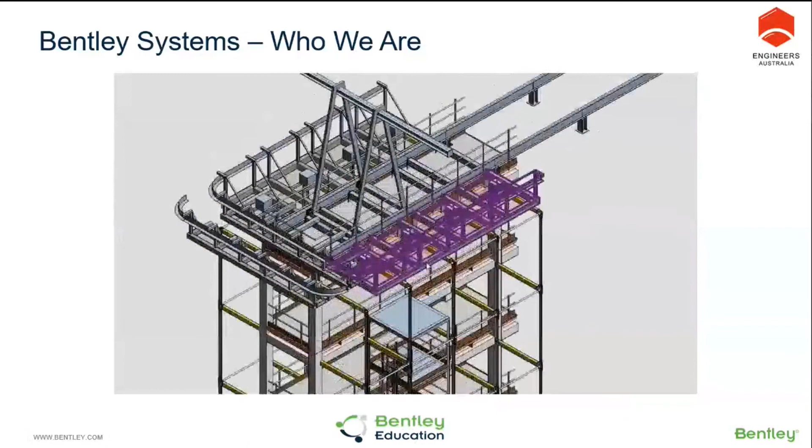We wanted to use digital technology to do it in the best possible way. This is the harbor - for this we used Bentley software. We're very proud of our association; this is an oil industry project, and it's allowed us to be a leader in the industry. More importantly, Bentley's management has worked with us to help us feel comfortable working with Bentley, and that is what is driving us.

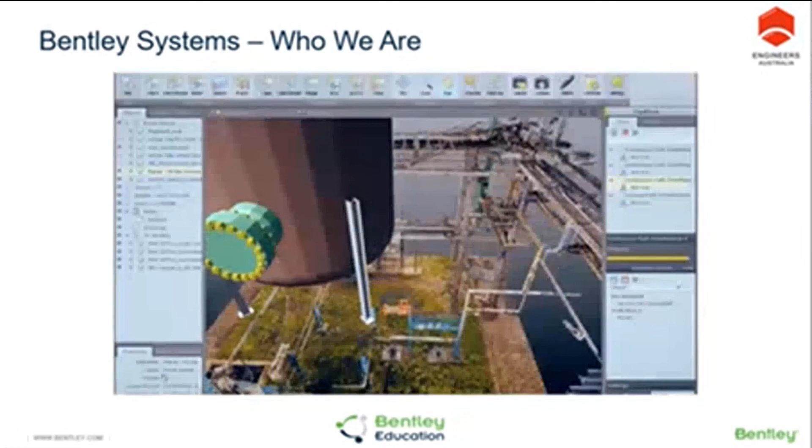Process industry, building industry, flood simulation - we saw that - traffic simulation. Bentley, advancing infrastructure. 7 out of 10 leading organizations in the world, or 89 out of the top 100 Fortune 100 companies, use Bentley tools at some stage or other.

So one, you're learning digital. Two, if you learn Bentley tools, that enhances your chance of winning a job opportunity. Let me also give you another story of why this is - there is not one single software company which takes care of either designing, analysis, building, or operating, or looking at a whole city, whatever infrastructure is needed - Bentley has it.

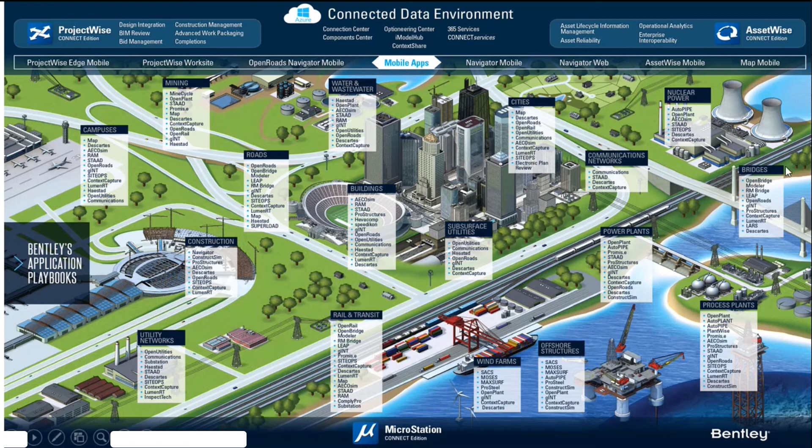If you're talking about cities, all the building, yes. Water supply, wastewater, yes. Road to get to that city, yes. Building, yes. Power, gas, yes. Travel by road, rail, yes. Campuses, yes. I'm not even going into process plants and offshore structures. So is it not wise to invest your time learning Bentley tools, because it gives you an opportunity to look at any possible infrastructure, and all digitally as well. I don't think there's one single company which provides such breadth and depth of product, and all of this comes to you.

How do I start my first step? You saw what digital engineering and digital twin is, what the career opportunities are, how most of the leading companies in the world are using Bentley tools, and you saw the length and breadth of it. So what should be my first step towards building a career?

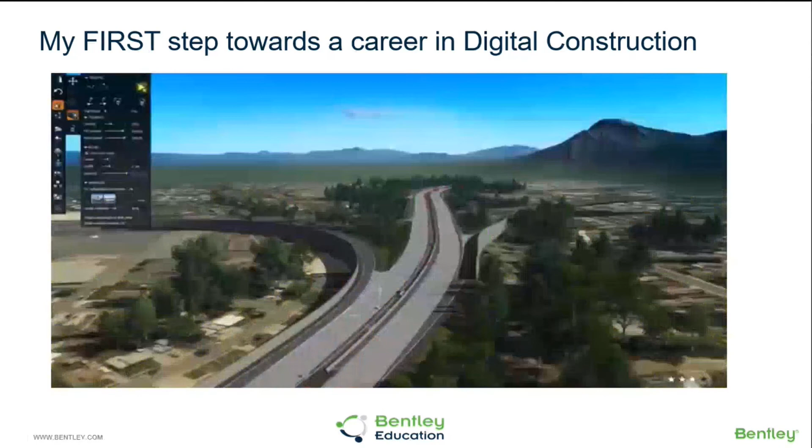Here we go. This is infrastructure. And this. But so is this. It's here. It's way out there. It's everywhere. And it's essential. Definitely essential. Infrastructure works hard, and so do the millions of people who make it work. Not sitting in an office all day plugging away on a spreadsheet until your eyes pop out of your head hard. No, these jobs are different. These jobs use your whole brain. Jobs that take you to the far reaches of the world. Jobs that change the world. But how do you get in on this? So glad you asked. We're Bentley Systems, the infrastructure engineering software company. Our software builds all that stuff. Were you expecting a protractor? Hang on to that. This is Bentley Education. It's an online platform built to connect you to the infrastructure world. It's got everything you need to begin a career in infrastructure and the tools to make it happen. Here's a breakdown: complete access to the software that the pros use, a network of industry professionals, plus bonus resources, news, travel opportunities. You guessed it, all at no cost. Bentley Education is giving you the tools and hands-on training to help you navigate the real world and make your mark in it. So click the link below, give us some quick info, and prove you're not a robot. In just a few clicks, your journey begins. Join us and build yourself a new world.

Four taglines, according to me, four tag words the whole process is about. All this infrastructure job is to change the world, and it takes you places - that's one tag word. And how do I get there? That's about Bentley Education, which gives you a tool to learn. It gives you a learning process, learning materials that are available. It connects you to the industry to find out, am I learning the right thing, am I doing the right thing? And all of this, the biggest tagline, at no cost at all.

So the first step towards a career in digital engineering is to visit this page. It's like when you want social contact, you get on Facebook. When you want professional contact, you get on LinkedIn. When you want to be a digital engineer, the first page you need to visit is education.bentley.com. Why am I saying that? What is so good about it? Let me show you.

We have another 4 or 5 minutes, right? So give me that 4 or 5 minutes. I am trying to log into that site now.

Hopefully my bandwidth holds up. See, this is the Bentley Education Portal. The mission of Bentley Education, which is for Bentley Engineering - Bentley Systems is a $700 million sized company - is to give back to the learning community with three objectives: give them digital knowledge so they can plan a career 10 years from now, give them a lot of learning opportunities so they keep updating their skills, and give them all the tools to learn, at no cost at all. That's what the whole concept is about.